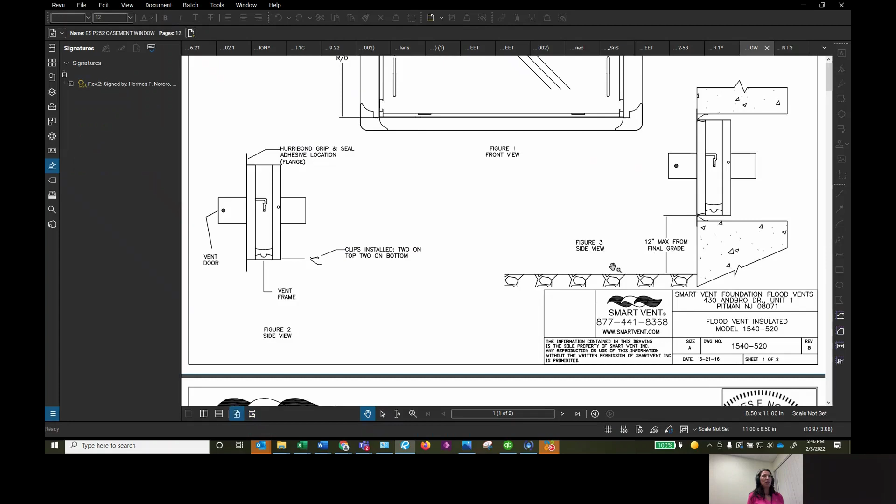So we're going to be looking for two products today. We'll have samples of how plan reviewers like to be presented with the product approval, and I have two different products we're going to look at. This is a casement window, and this is how I often get the document - here you can see an aluminum casement window.

When we receive this, we verify that the date is accurate. We are in 2022, so this date is not accurate - it's past its time. So what do we do? We ensure that this product is still valid, maybe it has been updated, maybe we can still use it, and I'm going to show you how.

So remember the number: 18-0221.07. So let's go - that is a Miami-Dade product, it's an NOA, that gives you the key. And this product is 18-0221.07. That's the product. Look at the status: expired. File is expired. Okay, so what do we do?

It says that file has been superseded by this one. Sometimes the product is not even expired and it's still superseded. So I copy this entire number and write it down, because when you paste it in the previous page, sometimes a number is missing, but I copy and paste it and I just get the new one. Look at that - the file is again expired, and it was superseded by the next one. So we want to grab this one.

Copy and paste, go back, do it again. All right, this file is approved - this is the one that I wanted to use. This is the product approval, and it's still good until 2026. It's not past that date, so we're good to go. We're good to use this one.

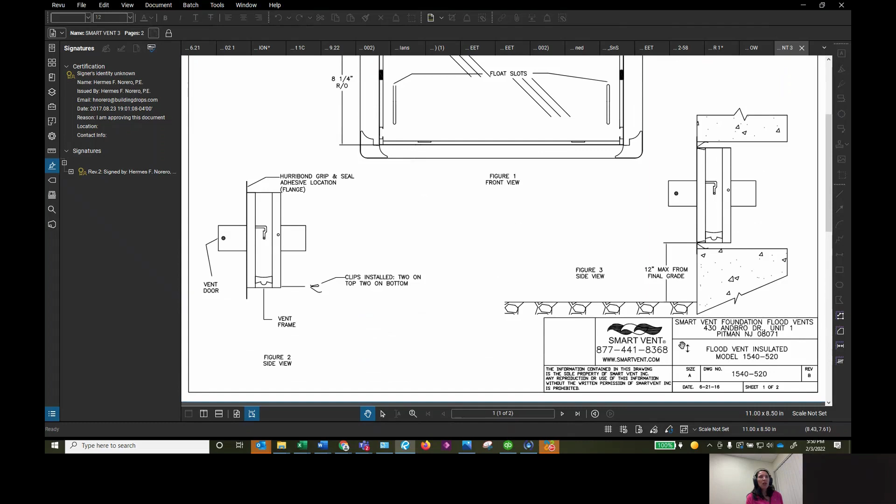So what we do, instead of going back and forth because it wastes time, we look for the information. Sometimes you can find it, sometimes you cannot. But start here - look at what it is, look at the brand. So I know it's a SmartVent, an all-over SmartVent. And then look - it is a flood vent insulated model 1540-520. Okay, I'm going to use this information to look for what I need.

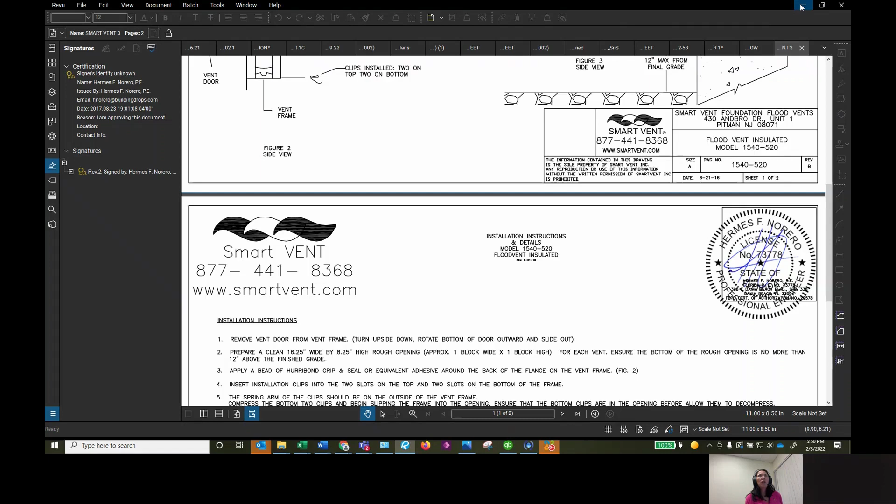So let's go look for the information. I'm going to cut this up so we can use it and don't forget it - I'm going to use this little piece of information so we can call it back in a second. All right, let's go to the Florida product approvals and bring up what we just cut.

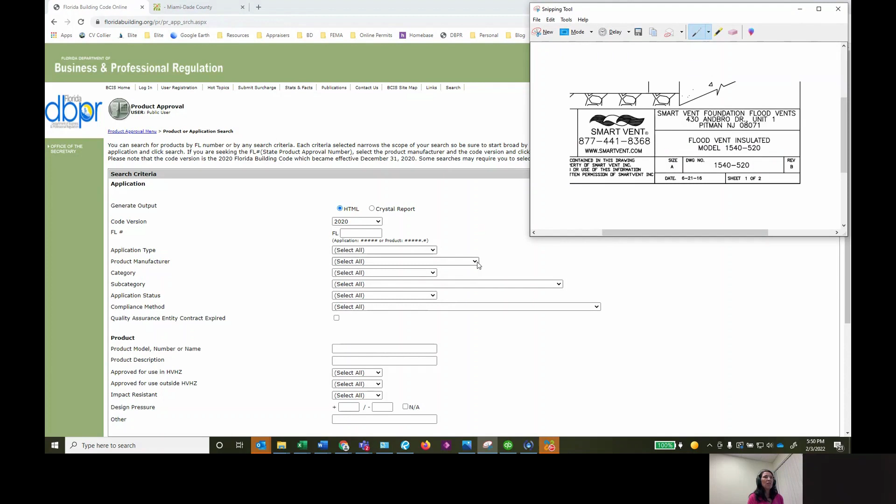Okay, it's a SmartVent. So you look in here, you can search by application type - I never use that. Product manufacturer, I use this a lot, because if you know the manufacturer you can find something else. This is really tricky - you just click in there and type really fast the first word, because it's searched by it.

Okay, it brought me to smart shutters, but I need a smart vent. Right there, smart vent product. Okay, I'm gonna search by that. The other search capabilities update, you can look for subcategories.

It's not very clear what my flood vent will be. I don't want to choose anything because it doesn't fit anything. But I remember we knew a little bit more, we know the model number. Don't use all the information, use a little bit.

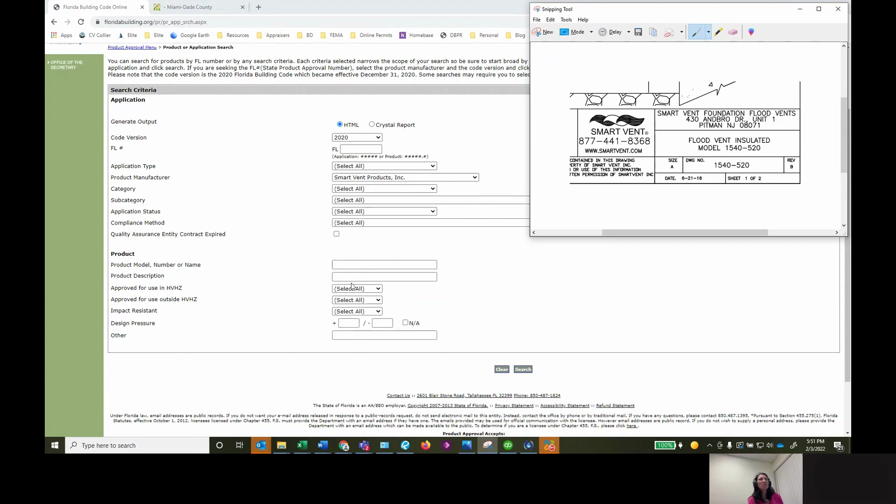I'm gonna use just the 1540, because when you put the dashes or the extra points, it just looks for something minor. I'm gonna use 1540 and just click search. There you go, you have a smart vent product. It's called a structural component. It's approved, you click in here. That's your product, that is a structural component. It's a smart vent product.

Okay, here we go, we have several products. Which is the product that I need to use? Okay, let's go back to that little picture we took. It says 1540-520. Okay, do I have anything that tells me that?

Well, here we have 1540, 10, 11. Okay, here it is, this is my smart vent model. This is the one, so it's 5822.3. Now you have these other options in here. You want to use only the installation instruction.

But before I do that, I'm going to tell you what are the parts that we need. The NOA is one file, really easy to work. You just print that file. For the Florida product approvals, they need the cover sheet, which is this one. It tells them a lot of information, plus the installation instructions. So we're going to grab both.

Remember, we do not do save as, we do print. It's already printed, I'm going to save as. Okay, so we're going to save it in here. Our product was on FL 5822.3.

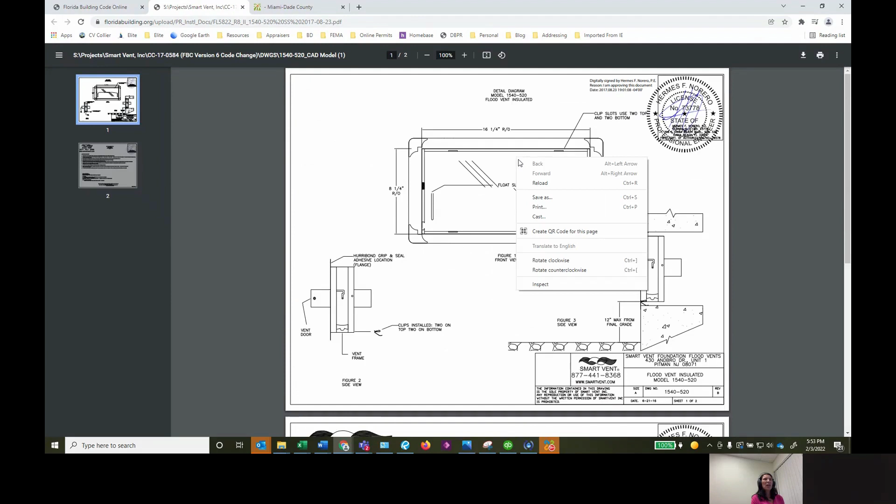So we go now here, 1540-520, and we click on our instructions. Okay, those look like the instructions that we originally got, right? Okay, I like to print them, always print them again from the website in case anything has updated and you are not aware. Sometimes the versions have different years or something, so I like to grab the latest one from there.

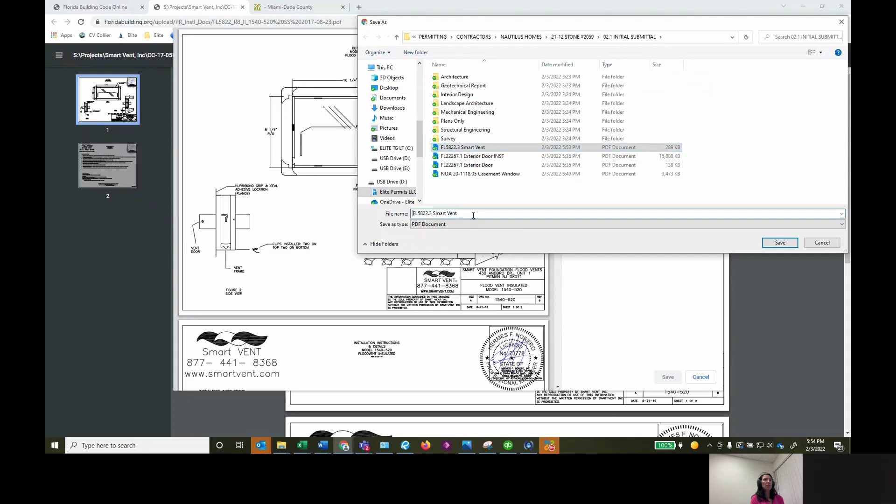I did save as, and I'm gonna save it again. And I picked the same name as I did before, Smart Vent, but I just put a little INST for instructions. Save. All right, so we got the products that we need, and now I'm gonna go to my file.

So these are the files that we have. I use a product that is called Bluebeam, and I have these two files. If you don't have a way to combine them, then don't, but if you do, I recommend you to do it. So what I do, I click in my cover.

This brings up my cover sheet that we just saved. And now I'm going to append my installation instructions to the back. This software is super easy, user friendly. So I just use page from documents, and it's going to bring me to the same folder that I was because I opened the project. So I use the same one, SmartVent INST for the installation instructions, and I attach it after my last page.

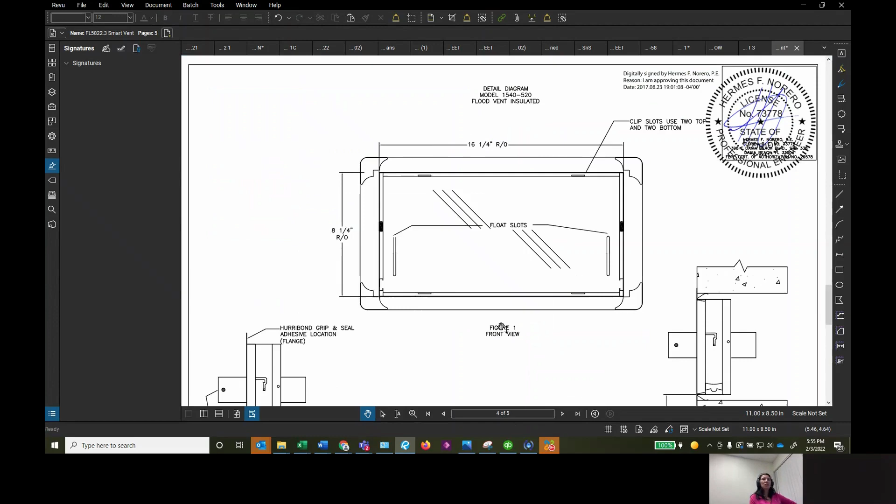Okay, so look on the bottom, it's one of 3 pages right now. After I do this, I have one of 5. So I have my cover sheet, second page, the third page, and my installation instructions. All right, now you save.

And I delete the extra one because now my product has everything in it. My vent has everything, the original has the 5 pages with the instructions. So that file is ready to submit.

What do I do in order to make sure that I have prepared the file properly, that it doesn't need anything else? What I do, I rename the file, and in the front, I always put a submittal number, submittal 1, submittal 2. It could be the first time I will put submittal 1, but if it's a recurrent submittal, because if a correction was required, I will put sub 2 or sub 3 depending on the number. All right, so sub 1, that file is ready, I don't have to do anything else with it.

I have this file, my NOA also was ready because we saved it and we verified. I also do the same thing. So those 2 files are ready to submit, and I just put them in my package together.